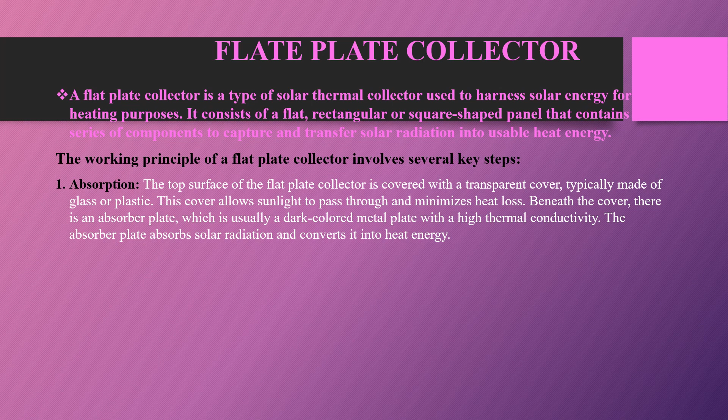The working principle of flat plate collector involves several key steps. First, absorption. The top surface of the flat plate collector is covered with a transparent cover, typically made up of glass or plastic. This cover allows sunlight to pass through and minimizes heat loss. There is an absorber plate, usually a dark colored metal plate with high thermal conductivity. The absorber plate absorbs the solar radiation and converts it into heat energy.

Second, transmission. The absorbed solar energy is transferred as heat to a fluid that circulates through the collector. This fluid is usually a mixture of water and an antifreeze solution to prevent freezing or boiling at extreme temperatures. Third, conduction. The absorbed heat is conducted from the absorber plate to the fluid circulating in small channels or tubes attached to the plate. These channels are typically made of metal and are in direct contact with the absorber plate to facilitate efficient heat transfer.

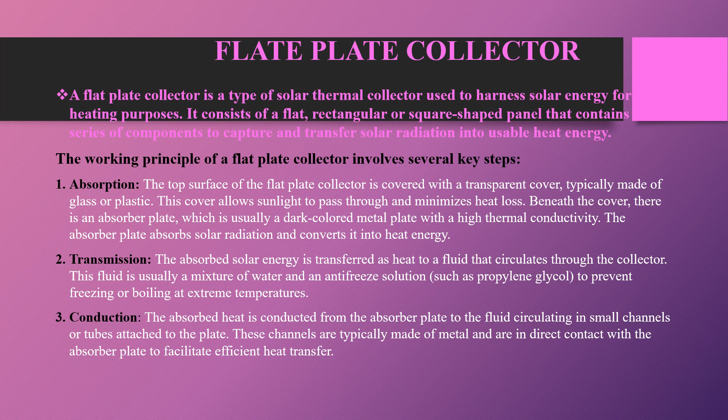Fourth, convection. As the fluid absorbs heat from the absorber plate, it becomes hotter and less dense, causing it to rise naturally due to convection currents. This upward flow of hot fluid carries the heat away from the collector surface.

Fifth, collection. The hot fluid is collected from the top of the collector and transferred to a storage tank or used directly for heating purposes. In a closed loop system, a pump is typically used to circulate the fluid continuously between the collector and the storage tank. Sixth, utilization. The collected heat energy can be utilized for various applications such as space heating, water heating, or powering an absorption chiller for air conditioning.

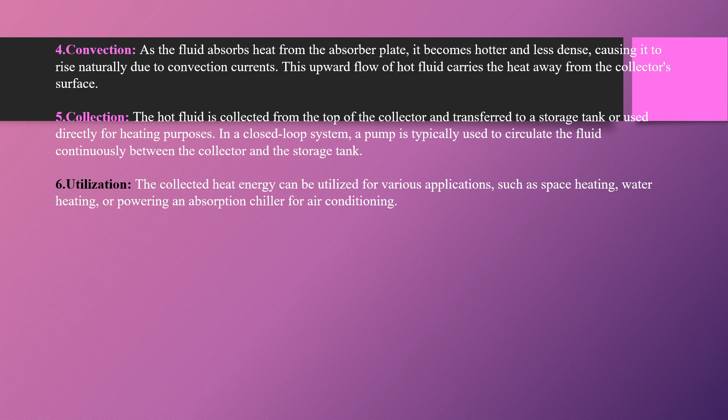Now let us see how a flat plate collector works. The working of the flat plate collector, known as FPC, involves the transfer of heat or thermal energy. The operating medium exchanges heat from the sun's rays. The heat absorbing plate of the collector is exposed to sunlight. As the sun's rays hit the flat plate surface, a portion of their energy is transformed into heat. This leads to a rise in temperature of the flat plate solar collector.

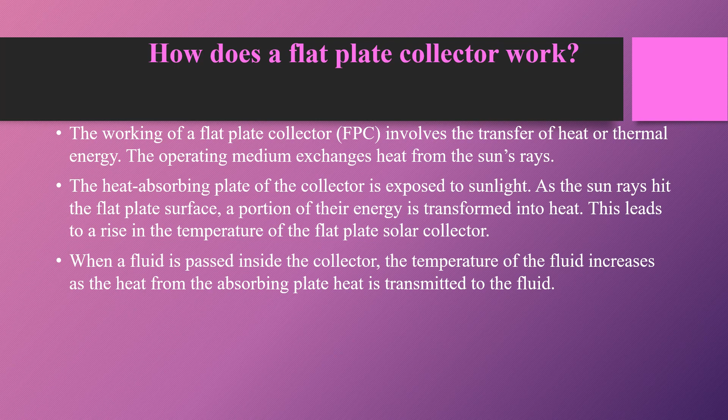When a fluid is passed inside the collector, the temperature of the fluid increases as the heat from the absorbing plate is transferred to the fluid. Eventually, the fluid transmits the thermal energy from the collector to the functioning energy system for different uses. It works on the principle of the first and second laws of thermodynamics.

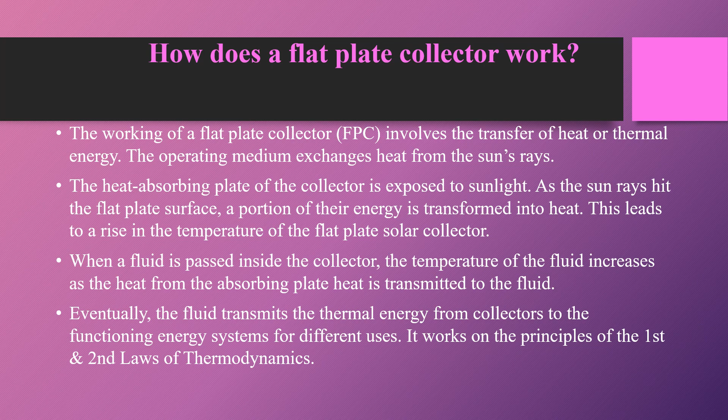Now let us see the applications of flat plate collector. First, domestic water heating. Flat plate collectors are commonly used to heat water for residential and commercial purposes. They can be integrated with an existing hot water system or used as a standalone unit. The collected solar energy heats up the water flowing through the absorber plate, which can then be stored for later use.

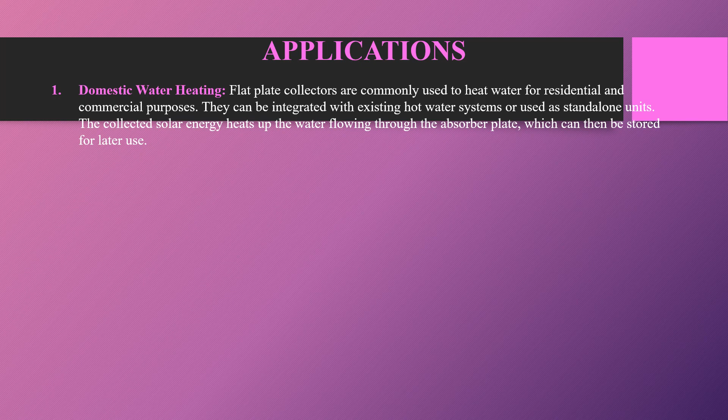Domestic water heaters. Second, space heating. Flat plate collectors can also be used for space heating applications. The collected solar energy can be used to heat air or fluid which is then circulated through a building's heating system to provide warmth.

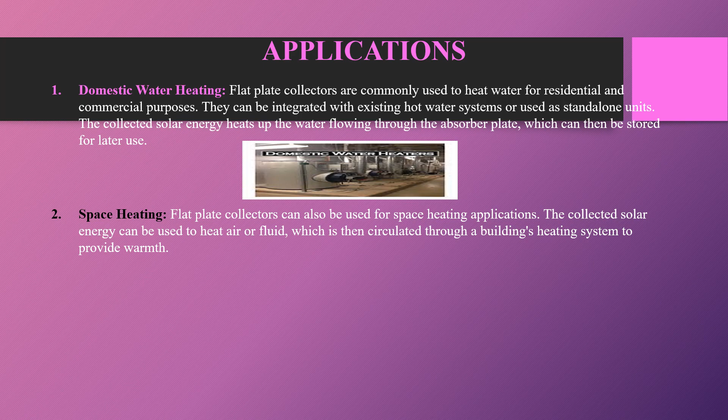Third, pool heating. Swimming pool owners often use flat plate collectors to heat the pool water. The collectors capture the solar energy and transfer it to the pool water, helping to extend the swimming season by maintaining comfortable water temperatures.

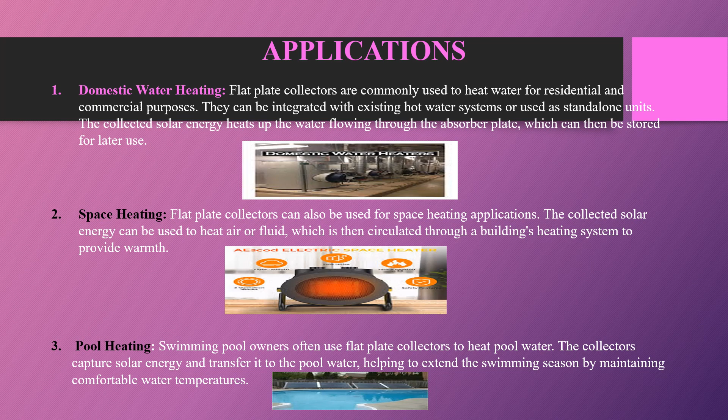Fourth, industrial process heating. Flat plate collectors can be employed in various industrial applications such as drying processes, food processing and manufacturing. They can also provide the necessary heat for specific industrial purposes, reducing reliance on traditional energy sources and lowering operational cost.

Fifth, agricultural application. Flat plate collectors are sometimes used in agriculture for tasks like crop drying or greenhouse heating. By utilizing solar energy, farmers can reduce energy costs and create a more sustainable farming environment.

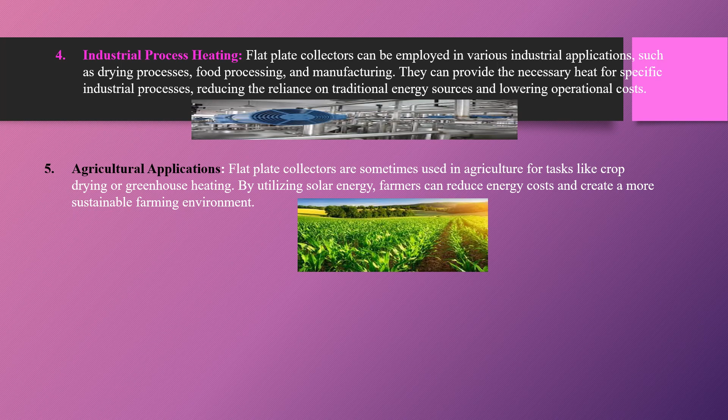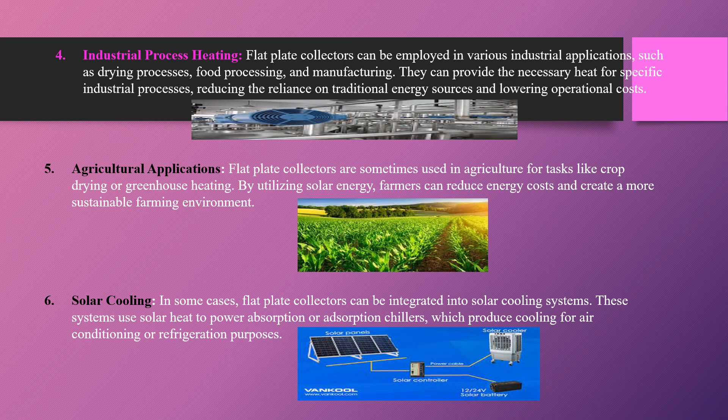Sixth, solar cooling. In some cases, flat plate collectors can be integrated into solar cooling systems. This system uses solar heat to power absorption chillers, which produce cooling for air conditioning or refrigeration purposes. Now, types of flat plate collectors.

First, based on glazing. Glazed panels are insulated panels that contain a glass covering. They block infrared radiation and provide insulation to the solar plate. Under the glazing, there is an absorber in which the working fluid flows. Glazed flat plate collectors are commonly used in household water heating installations.

Unglazed panels. These flat plate collector devices are not glazed. Unglazed panels are usually utilized for swimming pool heating installations. They are inexpensive but less popular. Their temperature range is less than 30 degrees Celsius.

Next, based on configuration: parallel absorbing plate. In a parallel flat plate collector, heat can be dispersed with a larger volume of circulating fluid via the branches present inside. It can be installed in both horizontal and vertical orientations.

Series absorbing plate type flat plate collectors include a sole continuous circuit. It has a high heat jump and a lesser volume of circulating fluid.

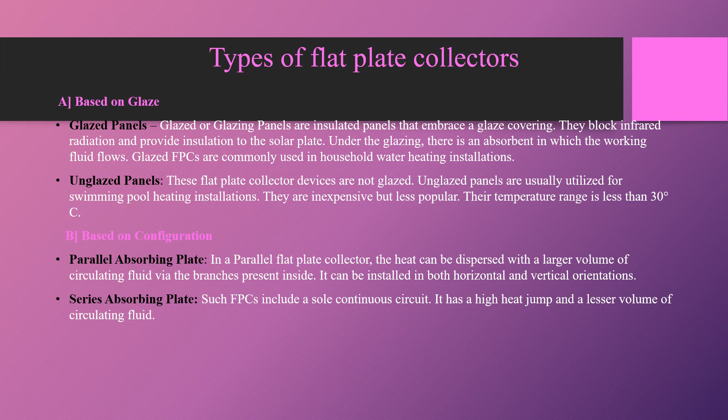Components of flat plate collector. Here are the typical components. Absorbing plate: it is the component inside the collector that traps the solar radiation. The absorbing flat plate converts solar power into thermal power. It is a dark plate generally made up of copper foil.

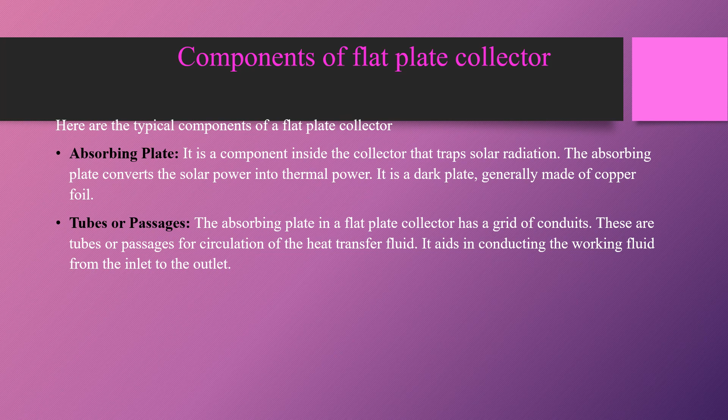Tubes or passages. The absorbing plate in a flat plate collector has a grid of conduits. These are the tubes or passages for circulation of the heat transfer fluid. It aids in conducting the working fluid from the inlet to the outlet.

Insulation or glazing cover. Insulation minimizes heat loss from the absorbing plate. It is present on the sides and back of the plate collector. The insulation is typically made up of synthetic foam sheets like fiberglass or polyurethane, etc.

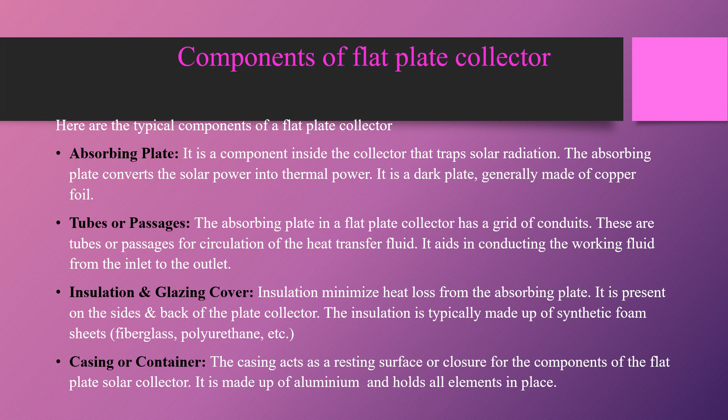Casing or container. The casing acts as a resting surface or closure for the components of the flat plate solar collector. It is made up of aluminium and holds all the elements in place.

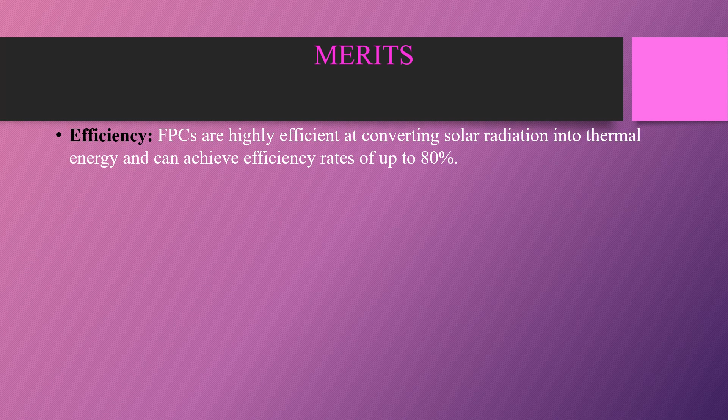Merits of flat plate collector. Efficiency: flat plate collectors are highly efficient at converting solar radiation into thermal energy and can achieve efficiency rates of up to 80%. Durability: flat plate collectors are durable and can withstand harsh weather conditions including extreme temperatures and hail.

Low maintenance: flat plate collectors require very little maintenance, which makes them a cost-effective choice for homeowners and businesses. Versatility: flat plate collectors can be used for a variety of applications including water heating, space heating and process heating.

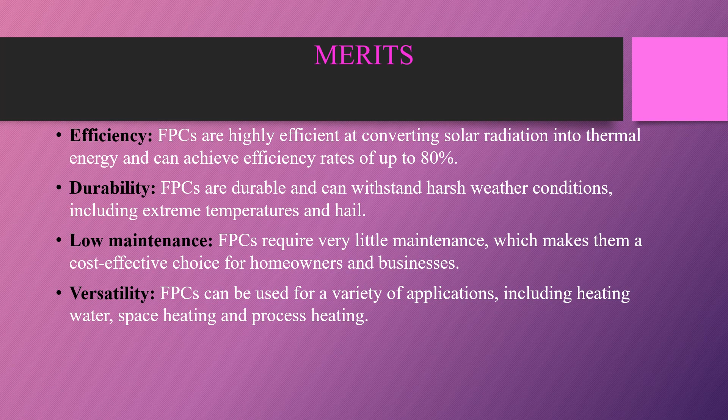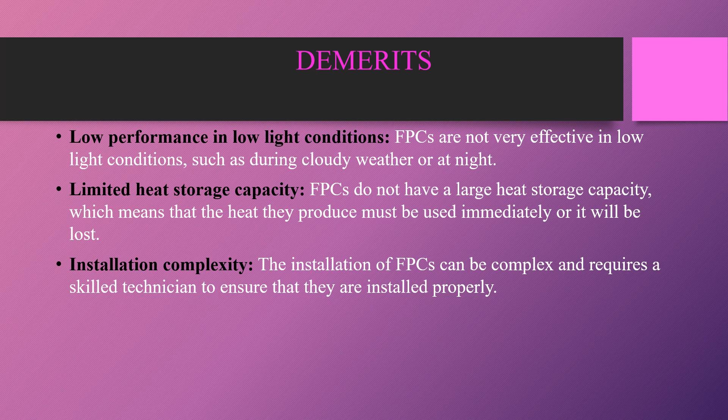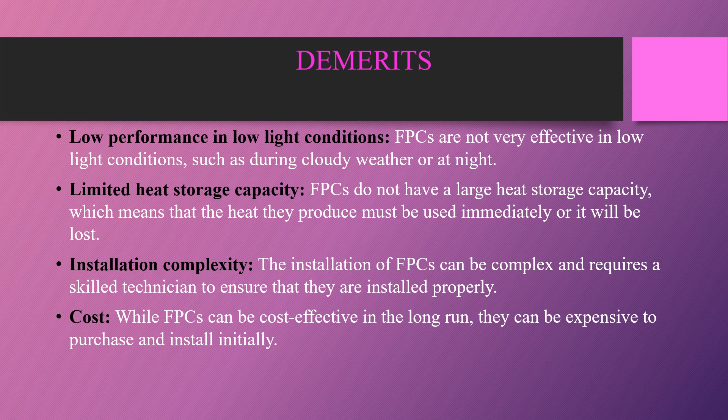Installation complexity: the installation of flat plate collectors can be complex and requires a skilled technician to ensure they are installed properly. Cost: while flat plate collectors can be cost effective in the long run, they can be expensive to purchase and install initially.

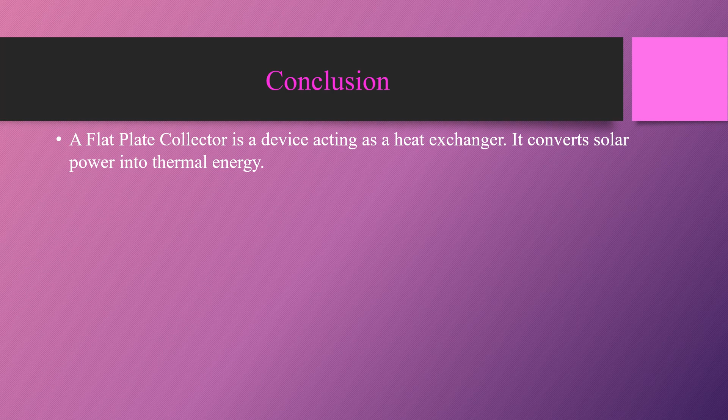Conclusion. A flat plate collector is a device acting as a heat exchanger. It converts solar power into thermal energy. It can gather the solar energy and use it to heat water in the house for bathing, washing, etc. Also, it can be used to heat hot tubs and swimming pools.

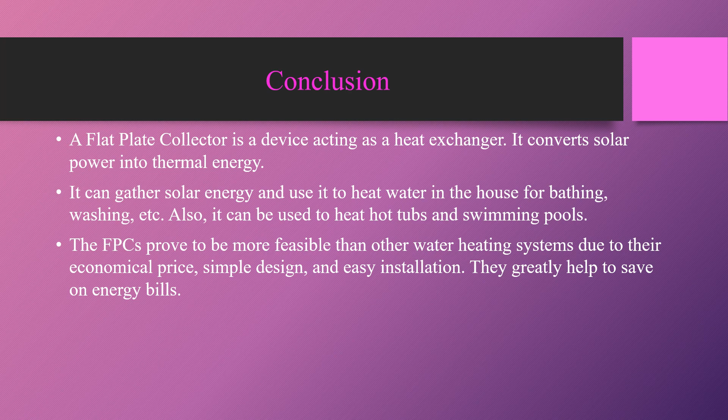Flat plate collectors prove to be more feasible than other water heating systems due to their economic price, simple design and easy installation. They greatly help to save on energy bills. Thank you.